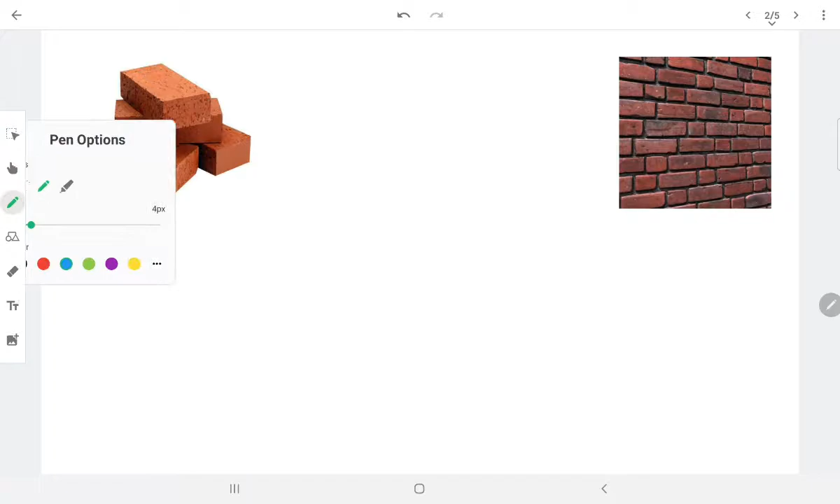Here I'll be taking the first masonry unit, that is the red bricks. So I'll be discussing first on red bricks. So these are the bricks used for construction.

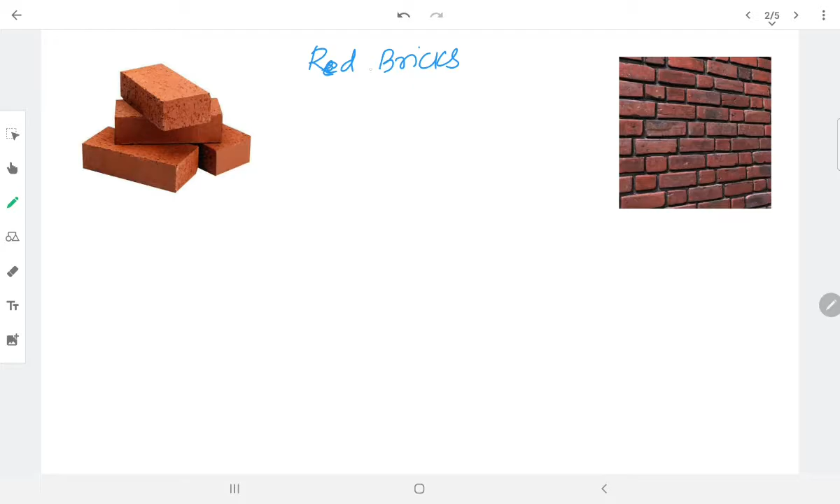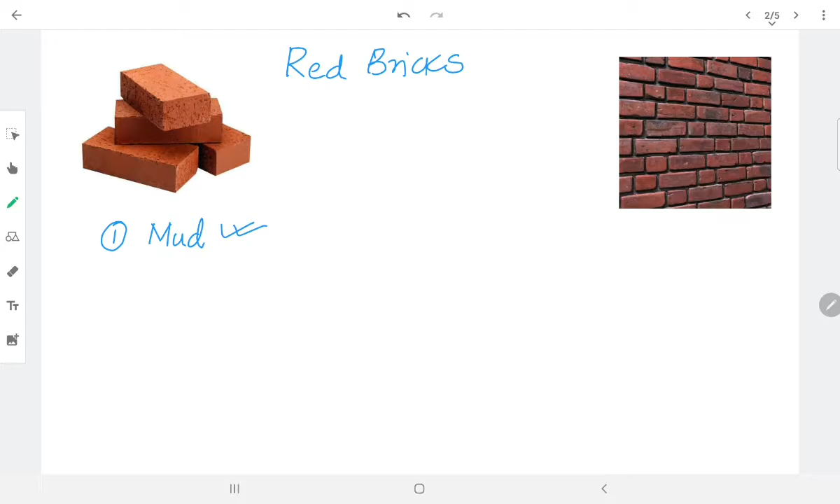Red bricks, or we call it brick units, first we must know the material used. This is manufactured using mud with a proper water content, which reaches the optimum - we call it optimum moisture content.

Here we must know the properties. As I said, first it is made up of mud. Second, its strength - the compressive strength is around 3.5 Newton per mm square. The strength of this masonry unit is 3.5 Newton per mm square.

Here you can see the brick masonry wall also. This type of masonry walls you get. It is made up of mud, its strength should be minimum 3.5 Newton per mm square, and there are different types of red bricks also - first class, second class, table molded, ground molded, different types of bricks are there.

Generally the standard size of these bricks are 9 centimeter by 9 centimeter by 19 centimeter. This is the standard size of brick. Here you can see this is 9 centimeter, and this is 9 centimeter, and the length of this brick is 19 centimeter.

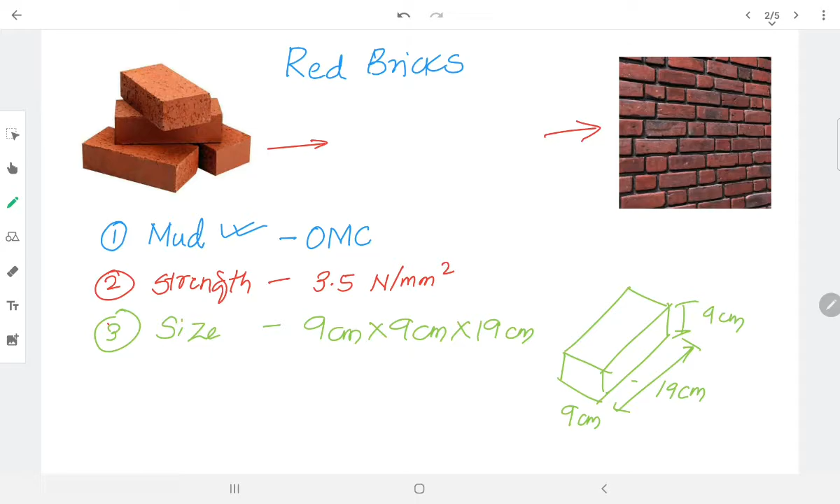Like that we'll be having the size, and the joints are more as compared to other blocks. So we'll do the comparison later, but first we must know the properties. So the fourth point is the mortar consumption is quite high here, and the density of these masonry units is around 19 to 20 kilonewton per meter cube.

It will be around 1900 to 2000 kg per meter cube. So we'll only be discussing this so I won't be in confusion - the density is 19 to 20 kilonewton per meter cube. So suppose if you take a 1 meter length of wall, for example...

If you take 1 meter length of wall and its height is also 1 meter, and the thickness of this wall is - I'll be taking here - this is 1 meter, this is also 1 meter, and its thickness is 0.23. So the total volume of this one will be calculated: 1 into 1 into 0.23.

So the weight of this wall is equal to - that is 1 meter into 1 meter into 0.23, it will be 0.23 cubic meter, into the density, which we take as 20. It will be around 4.6 kilonewton - this is the total weight for 1 meter by 1 meter into 0.23. Its weight is around 4.6 kilonewton - 20 into 0.23. I'll be checking once again, it may be different. So it is around - so this weight of this wall is 4.6 kilonewton. Later you can check.

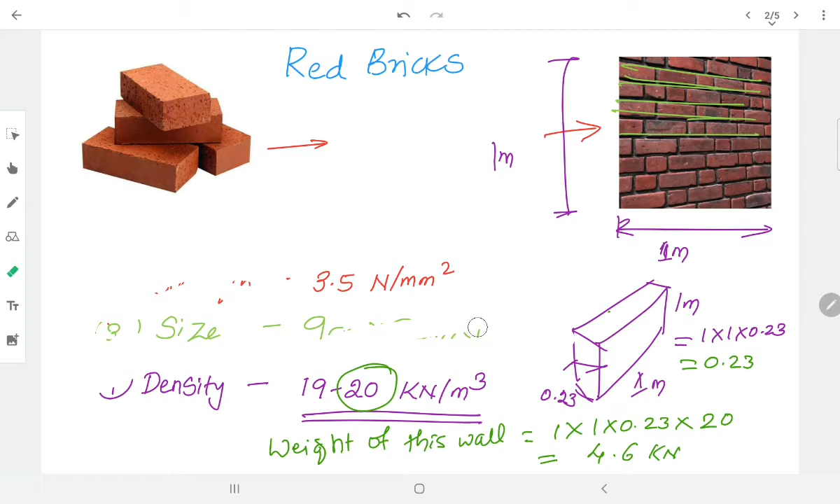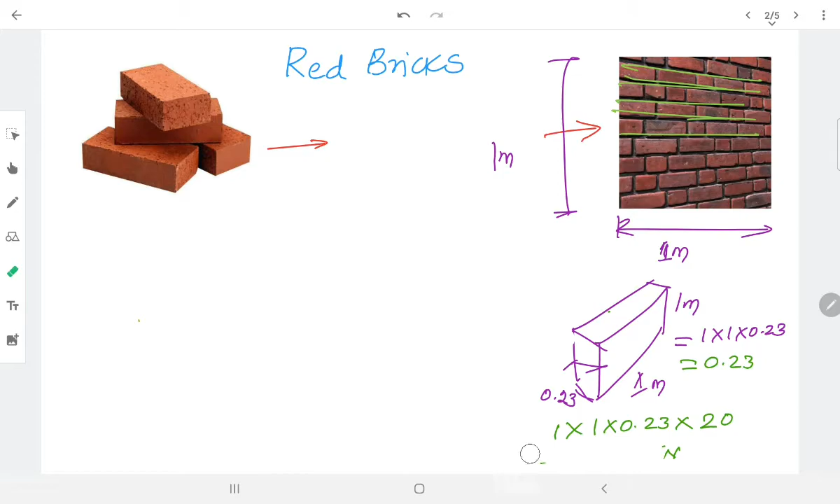So next, these are the properties. Now I will discuss about the advantage - where you can use this. Here I'll be checking with this one. What are the advantages of this masonry unit, and what will be the disadvantage, and which one to use in which condition - that I must know. As you know, here I have taken a wall length of 1 meter by 1 meter. We got a weight of how much - 4.6 kilonewton.

One advantage is, if you construct buildings at very less height, like only one floor, you can use this. Second, if you don't have skilled laborers, you can use this, because since ancient years we have been using masonry units and our workers are skilled with this only. So when constructing only one floor and you don't have skilled workers, since their skill is only to construct these blocks, you can go for that. Third, if you're not bothered about the dead weight of the structure, you can use this one.

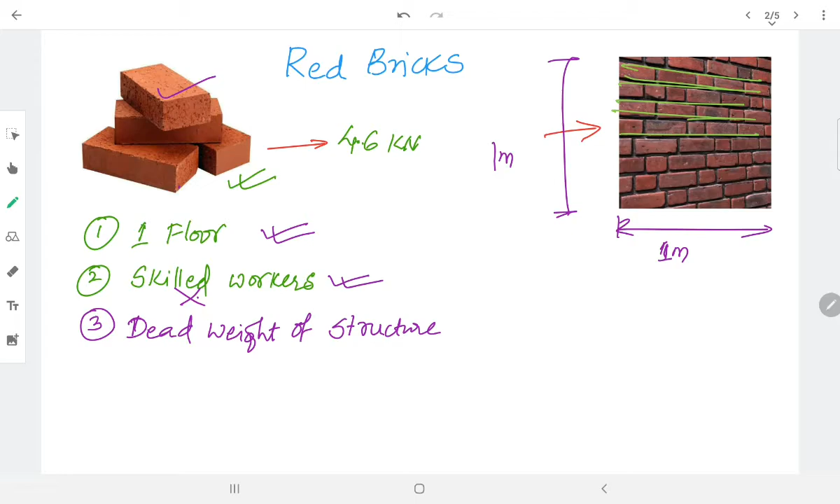We have some disadvantages also. First, its density is quite high. Second, it may hold moisture, meaning high water absorption capacity. And it may have affected strength. So these are all the disadvantages of red bricks.

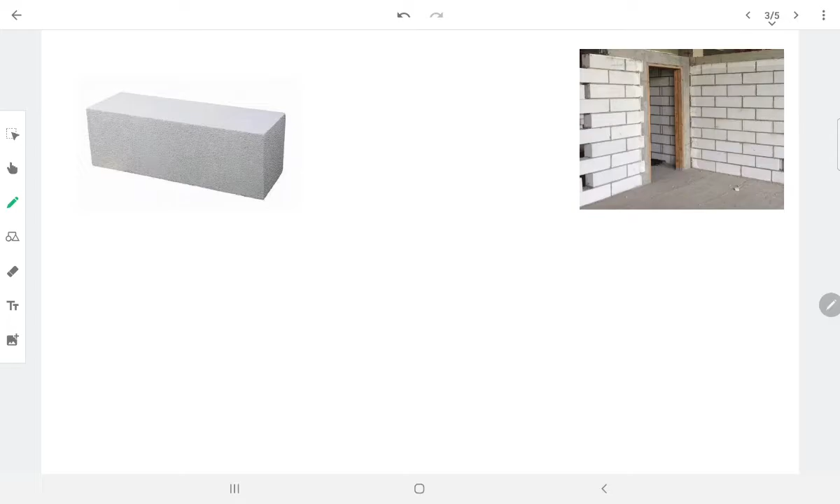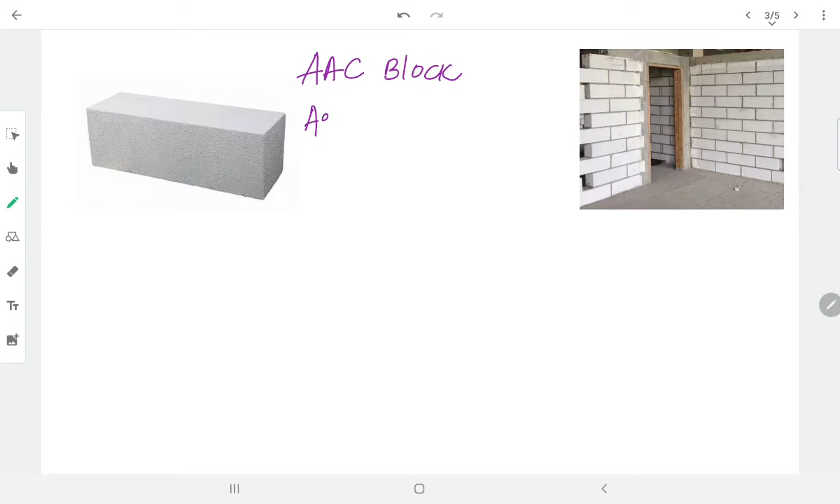We'll discuss another type of masonry unit, that is AAC blocks. Before going to that, what is this AAC? This is Aerated Autoclaved Concrete blocks.

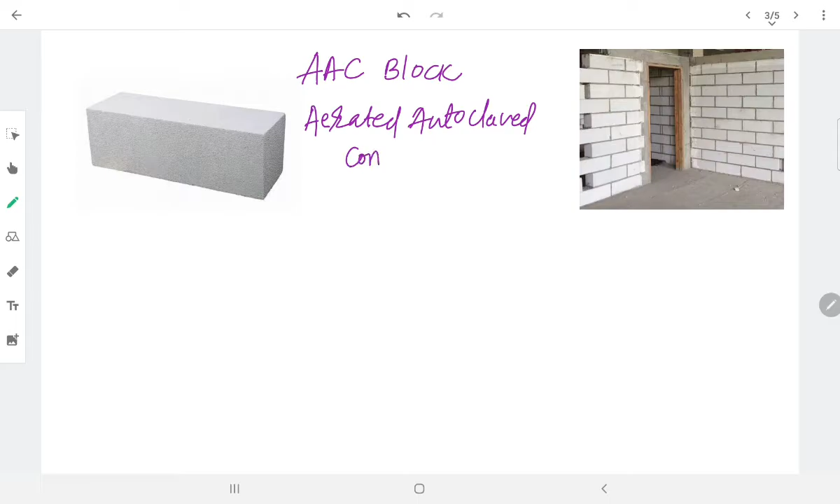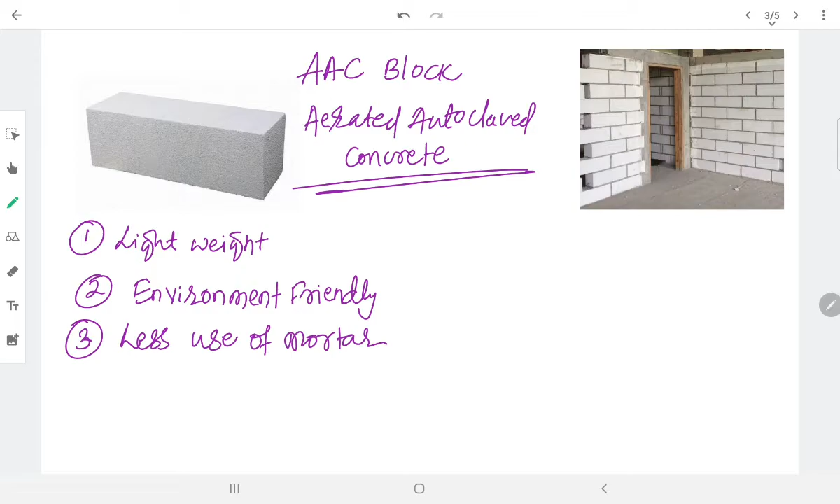Its first advantage is it's lightweight. Second, environment friendly. Third, less use of mortar. Whereas in the previous one, the thickness of mortar used is around 10 to 12 mm, here it is only 3 mm thick mortar.

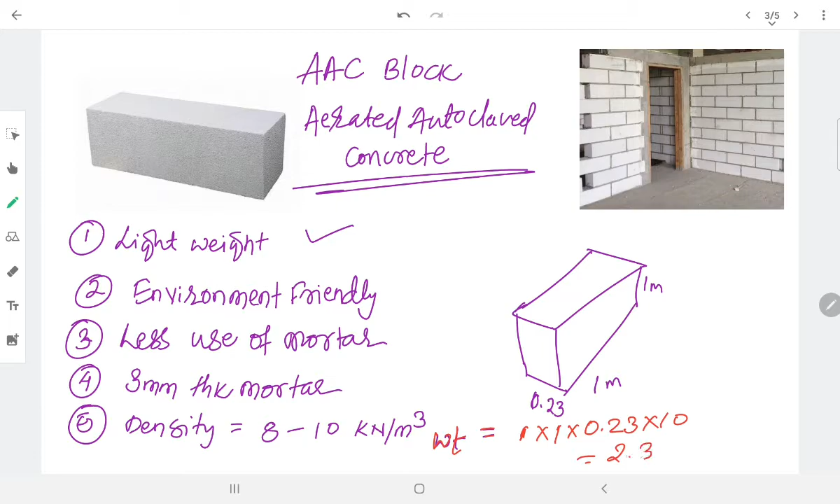As I said, it's lightweight. When you take a wall of length 1 by 1, you must know the density also. Earlier it is quite high, up to 19 to 20 kilonewton, but here it is 8 to 10 kilonewton per meter cube, even you may get less than this, always less than 10 kilonewton. So when you take this wall, its weight will be around 1 into 0.23 into 10, which is equal to 2.3 kilonewton. Weight of this wall is 2.3 kilonewton, whereas earlier it is 4.6 kilonewton.

We have some disadvantages also, I'll list out some. Before that, another advantage of AAC block is when you construct high rise buildings, you can go for AAC blocks because it's lightweight, as it reduces the dead weight of the structure.

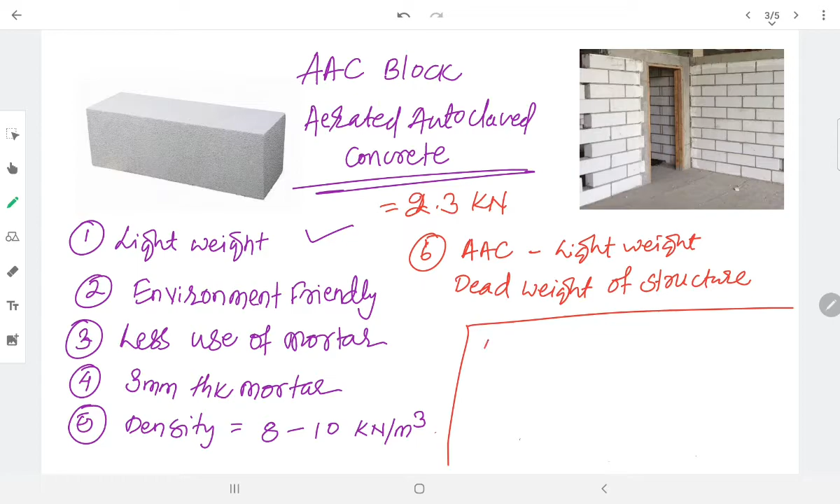Another disadvantage of this AAC block is its surface strength may be less. Another advantage of this one is speedy construction. These are all the advantages, and its water absorption is also very less. So you can go for AAC for multi-story buildings.

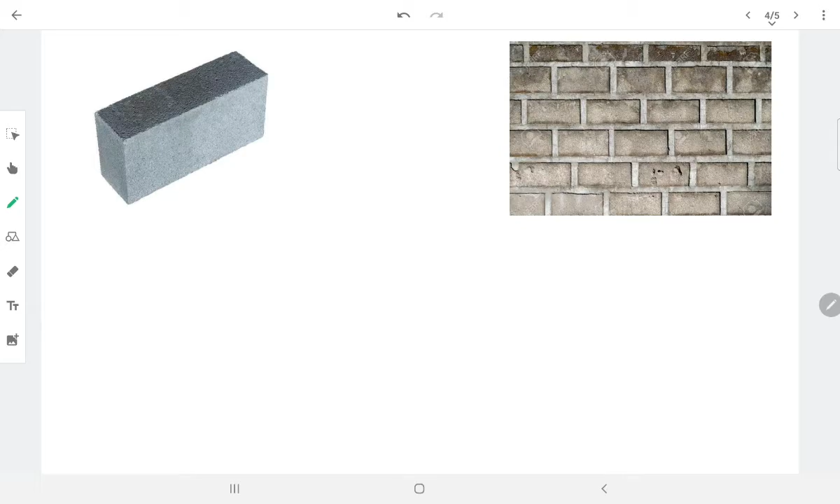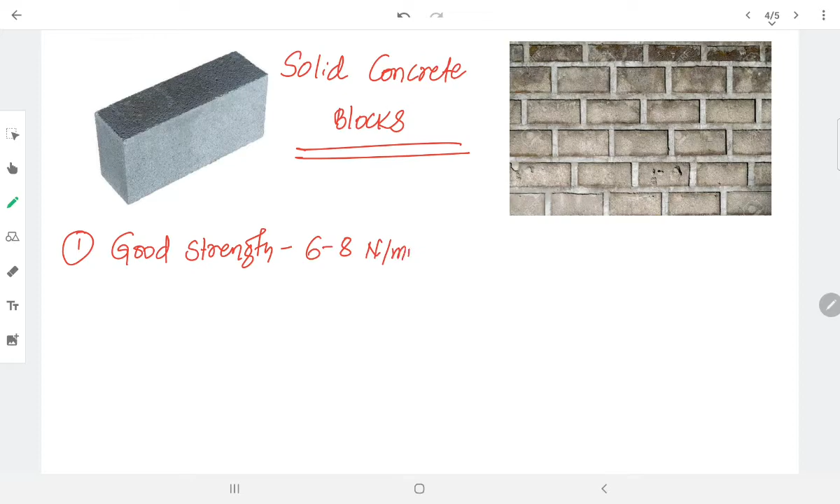We have another type of brick masonry, that is solid concrete blocks. These blocks will have good strength, around 6 to 8 Newton per mm square, whereas AAC blocks are having 3.5 Newton per mm square, sometimes 3.5 to 5 Newton per mm square. Solid concrete blocks will have 6 to 8. Second, surface strength...

Surface strength is good, meaning the capacity against scratching. Its surface strength is good. Third, water absorption is less as compared to the mud blocks. And the size is more. Size will generally be around 6 inch thick, 9 inch thick, and sometimes 4 inch thick. Length 14 inch, sometimes around 24 inch, and its height is again around 6 to 8 inch. You'll be getting different sizes.

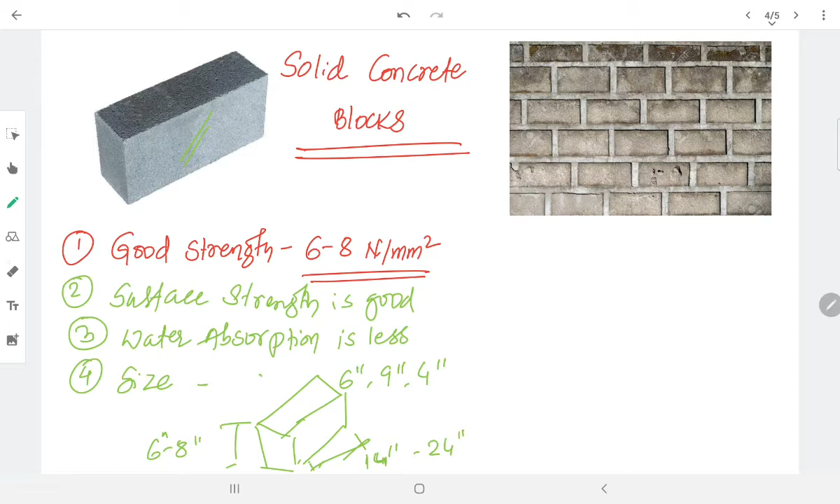The fifth point is its density, which is the most important part. Density of this one is around 24 to 25 kilonewton per meter cube. So when you compare these three blocks, this one has more density. When you take a wall of length 1 meter by 1 meter, width 0.23, its weight will be around 1 into 0.23 into 25, which is around 5.75 kilonewton. When you compare with the other one it's only 2.3, and the red brick is 4.6, this one is quite high. When you compare all the blocks, this will be quite high.

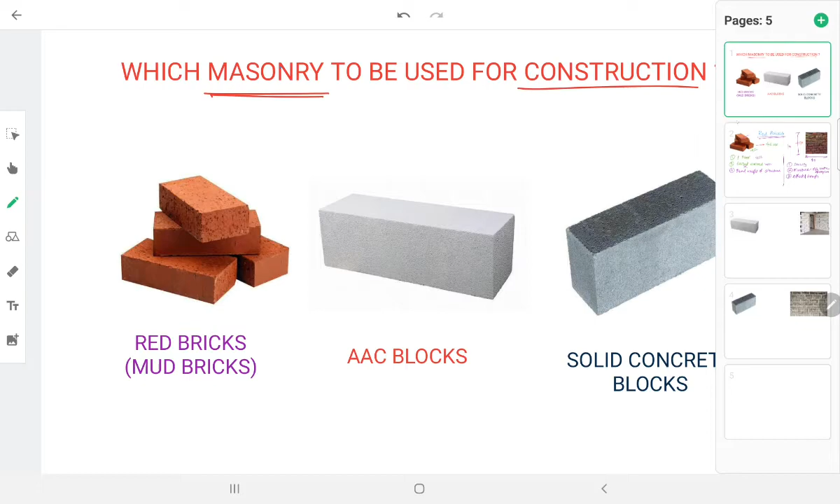So whenever you construct masonry, or use masonry units for construction, we have all three choices. I must choose any one among these three blocks, I must not say this is not good. In different conditions we'll be using different types of masonry units, you must know that. We had a discussion on where to use and what are the advantages and disadvantages of each. The major disadvantage of solid concrete masonry is, it has all the advantages but only disadvantage is its weight.

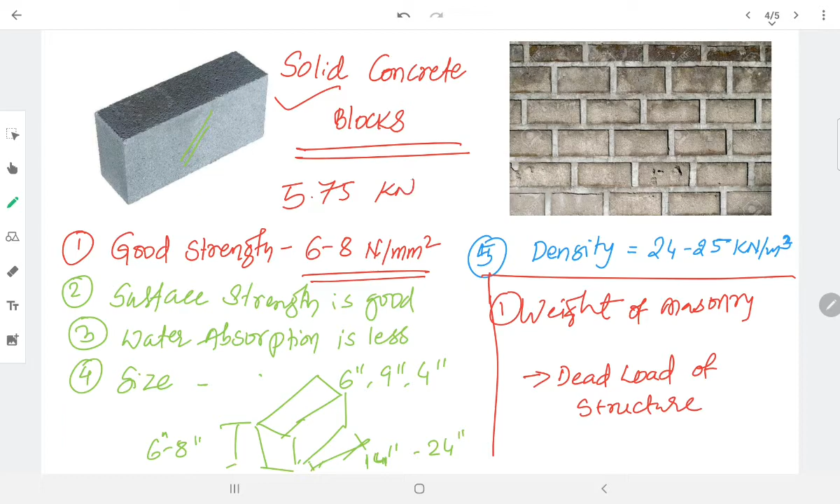The weight of masonry will be quite high, and it affects the dead load of the structure. When you construct multi-story structures using these blocks with the same wall thickness, it becomes quite costly because its weight is around 5.75 kilonewton.

So when you compare these blocks, choosing the right one is a difficult task. We have divided all the blocks, and each has advantages and disadvantages over one another, but we still need to choose the best for different types of construction. For example, when you compare strength, obviously the solid concrete blocks are good.

When you compare unit weight, AAC blocks are good. On adaptability, nowadays people have already adopted this one and are looking for it. And next, for speedy construction, obviously the AAC blocks will have speedy construction.

When it comes to economy, I'll go for the AAC block, though skilled labor is required here. But when you are only constructing the ground floor structure or a single story building, I'll go for red bricks.

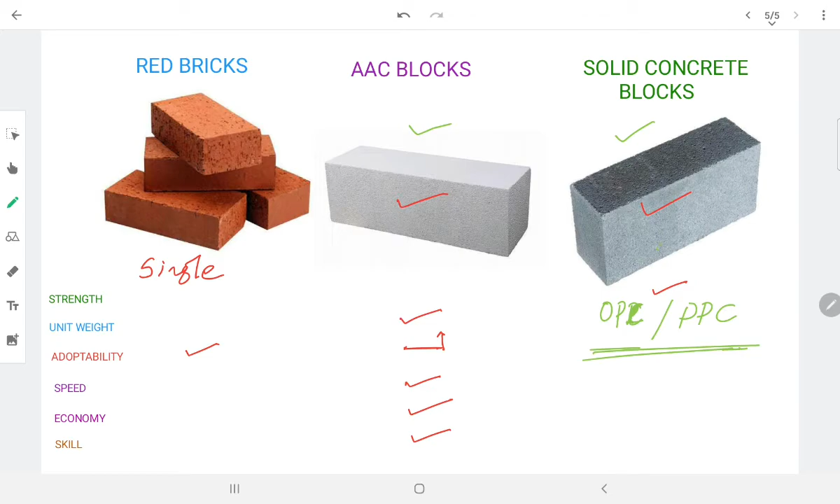When it comes to solid concrete blocks, we'll be using either OPC or PPC cement. OPC cement carries quite high heat of hydration, and we'll be using aggregates in this, which again leads to mining.

Red bricks are quite good, but their size is very small, so the mortar consumption is quite high. When you compare red bricks with AAC blocks and solid concrete blocks, the mortar consumption is quite high as compared to these two blocks.

So overall, nowadays for economical construction, I'll be choosing AAC blocks. It is a trend nowadays, but the only thing is that its strength should be achieved at a required level, then only can you go for AAC blocks. And skilled labor is required for AAC.

As you know, the mortar thickness required is very less for AAC—only 3 mm mortar will be used, whereas for the other blocks, 10 to 12 mm mortar will be used. So mortar consumption is very less, but the skilled labor required is more.

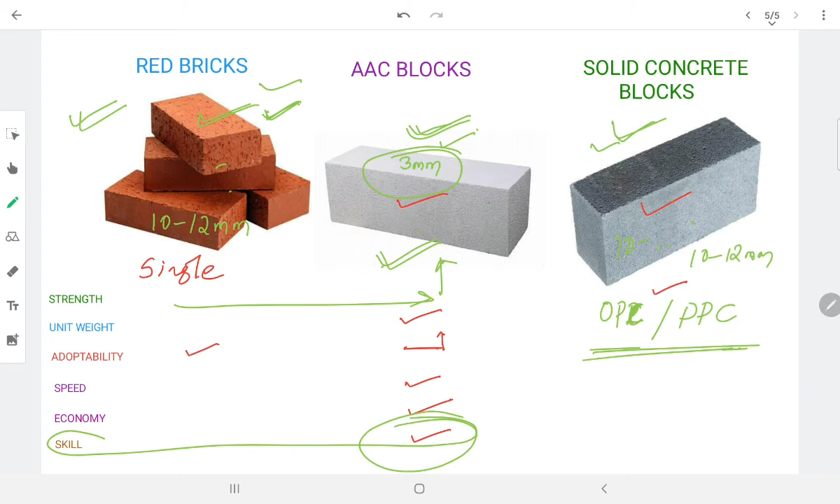Among these three, I'd like to prefer AAC blocks for nowadays construction over red bricks as well as solid concrete blocks. The only disadvantage of solid concrete blocks is its unit weight. When you compare AAC and solid concrete blocks on unit weight, AAC is good, whereas when you compare this with strength, solid concrete blocks exhibit more strength as compared to AAC.

When manufacturers improve the quality of AAC blocks, if strength reaches around 6 to 8 newtons per mm square, we can easily go for AAC blocks, even though AAC blocks already have many advantages over these two. So nowadays many people are looking for AAC blocks.

I think this topic is interesting, and we'll be discussing more on it, whether there are many other different masonry units. We'll be having another session on that one.